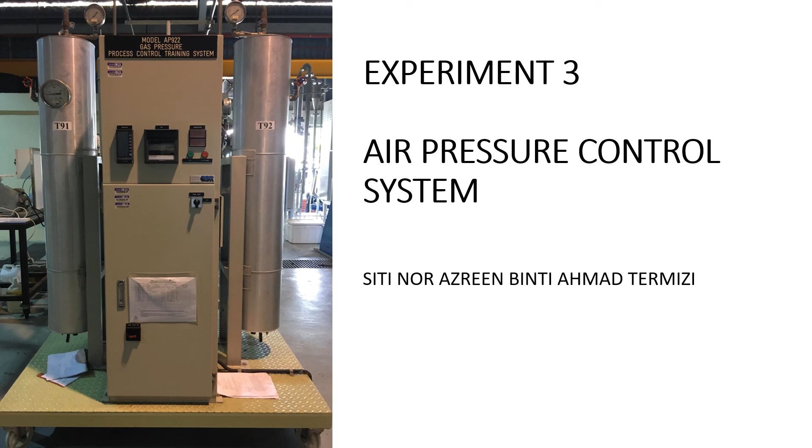So I make this special video for you to understand the experiment 3, which is air pressure control system. I did realize that if you just watch another video, you might have a lot of confusion. So I make this video special for you to understand this experiment. I really hope that you can watch till the end.

Okay, so this experiment has the objective to study the response of gas pressure control in two capacity or one capacity. But here I just explain for you the one capacity because both of it is the same.

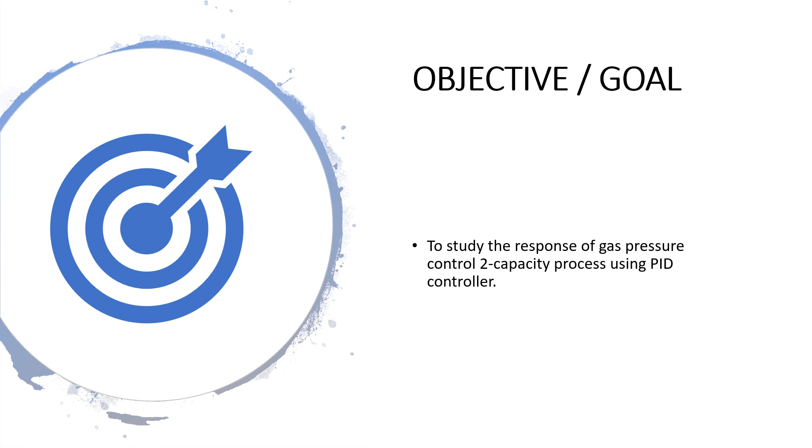So I really hope that you already watched this video, part 1, whereby I explain in general about the apparatus and how the system works. If you don't watch this yet, I would advise you to watch this first. Okay, so as explained in the video part 1, this is all the introduction to the apparatus. I will not go in detail on this one. You can go through this one in detail. At the same time, you can watch the other video, part 1.

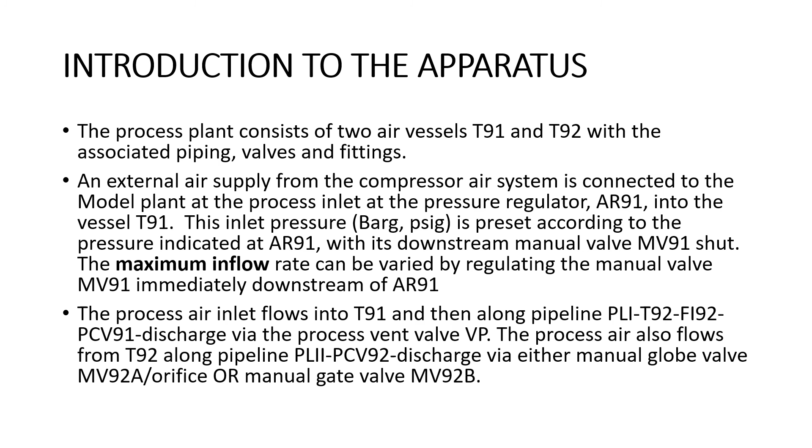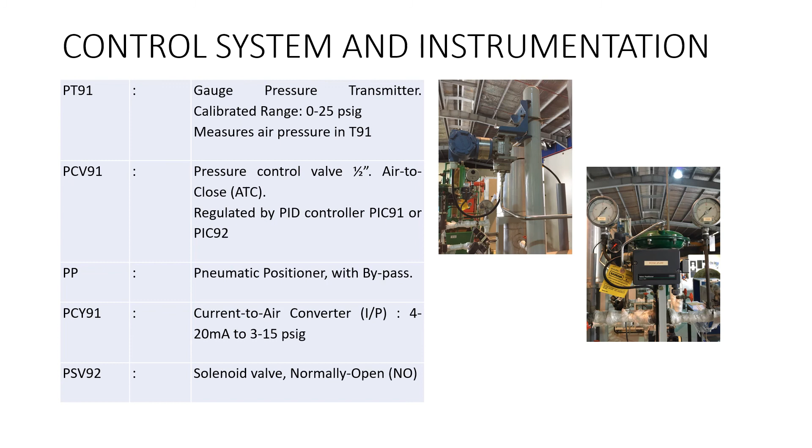We also have pneumatic positioner. Okay, it's also here. We also have current to air converter or known as transducer, this box, and we also have a solenoid valve. We have PCV92. I did show it in the video. It is a pneumatic control valve, air to close. It is used to protect the system from overpressure. It will turn on automatically when the high pressure occurs.

We also have a pressure gauge, temperature gauge, and FI92, which is a flow meter. You will see this flow meter in the first procedure. We also have pressure relief valve and a solenoid valve. And the most important here, we have a PID controller known as pressure indicator controller 91. From the screen, this controller has the value of PV, which is the value of process variable, or currently the value of control variable inside T91.

It also shows the value of SV, which is set value or set point, and the value of manipulated variable MV. Here is the percent of PCV91 closing, since this valve is air to close. MV 100% means this valve is fully shut. MV equal to 0% means the valve is fully open. Since this is air to close valve, the percentage is the percentage of closing. Okay.

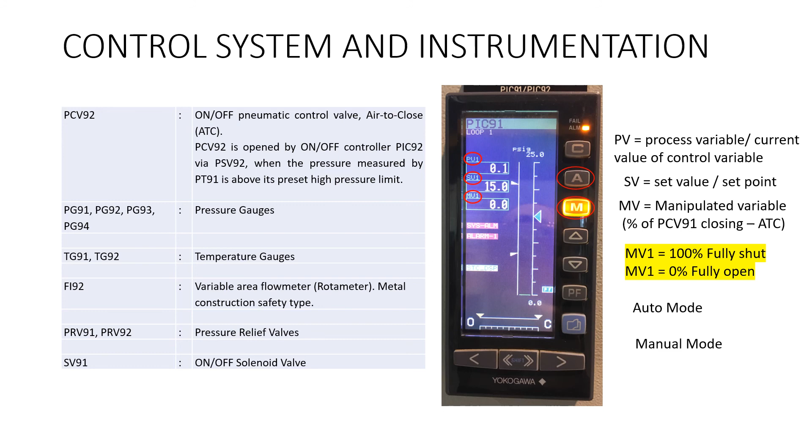So this controller also has two modes, which is auto mode. You have to press this button if you want to turn it into auto mode, or press this button to turn it into manual mode. The difference between auto mode and manual mode will be discussed later. As you can hear, this is an alarm. Okay, the alarm for pressure, alarm deviation.

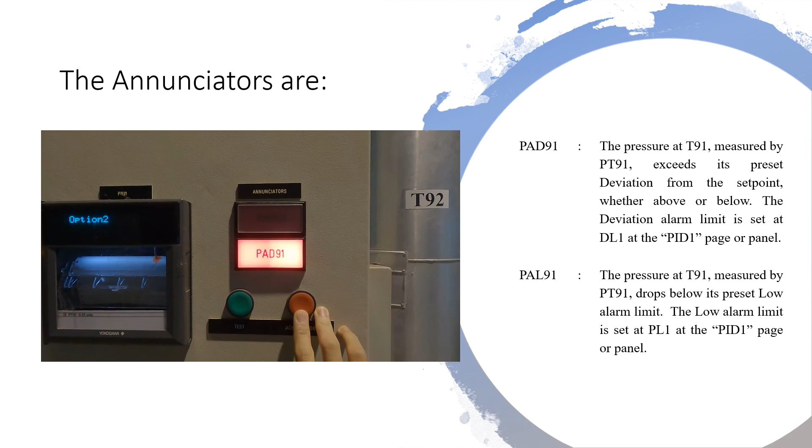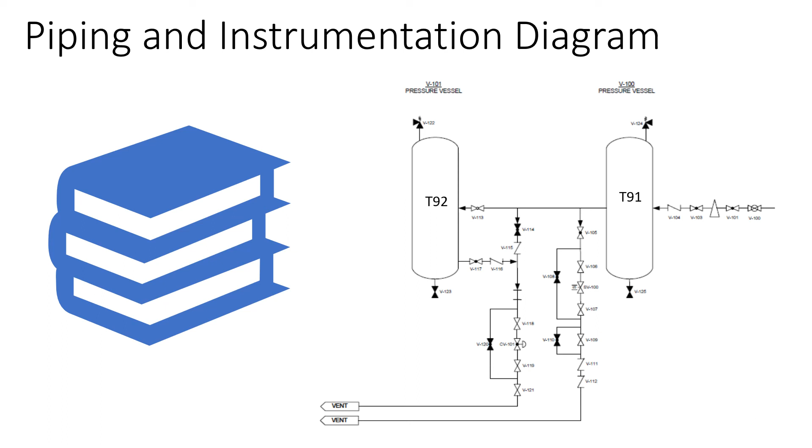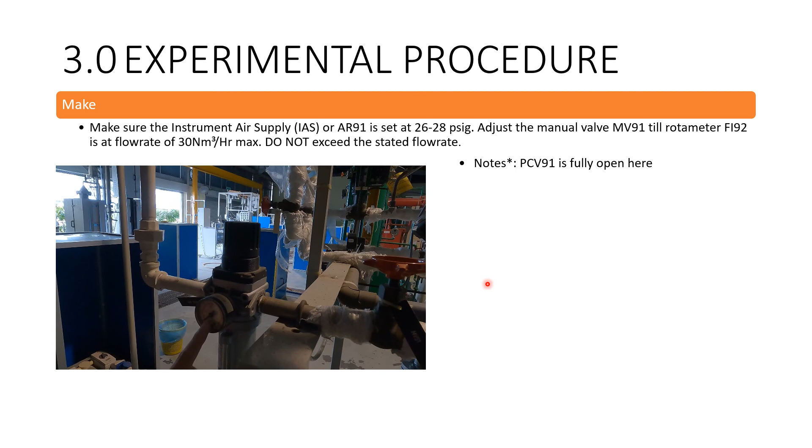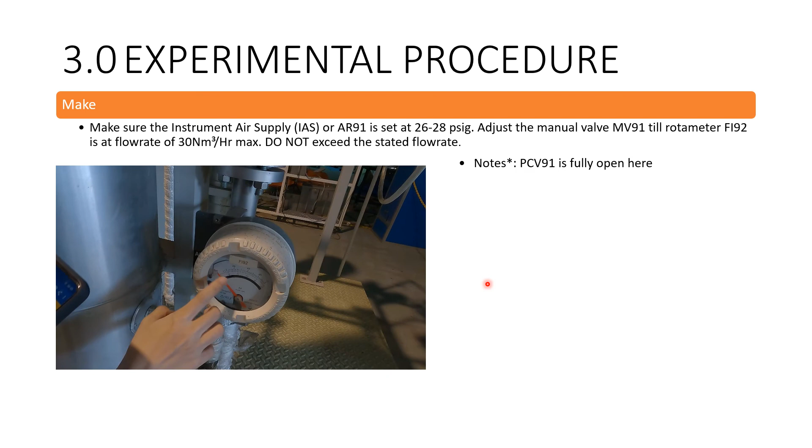Moving on to the first procedure, I did explain in the video. This is AR91, okay, is set between 26 to 28 psi. Okay, that is procedure number 1, by adjusting the manual valve MV91 so that this FI92 will show a reading of 30 normal meter cube per hour. This one. Okay.

Note that in this first procedure, you have to ensure the condition of PCV91 is fully open, but this is not stated in the procedure. I was adding that so that you can understand. In order for the gas to flow through this flow meter, the PCV91 should be fully open, because the location of this flow meter is at the outlet of the tank. Same goes with the location of PCV91.

The next procedure is for you to check the condition of pressure control valve. With the condition of pressure control valve fully shut, meaning to say the value of MV1 is 100%, the parameter PV1 should be within this range of value, 22 to 27. This procedure is for us to check whether the process air supply to the system is sufficient or not.

Okay, and in this case, you have to ensure that your MV1 is 100%, and in order to manipulate this MV value, this controller should be in a manual mode. You have to press this button. Once you get this value, you can proceed to the next procedure. If you don't get this value, you have to go back to procedure number 1.

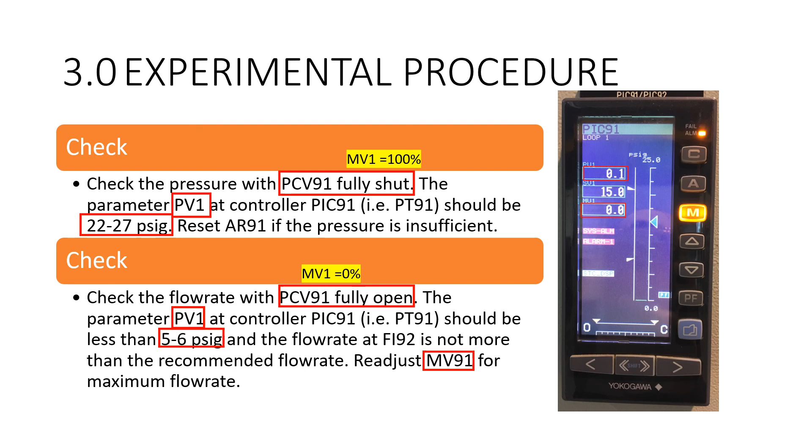For the next procedure, in the condition of pressure control valve PCV91 fully open, meaning to say the value of MV1 equal to 0, again you have to check the value of PV. In this control valve condition, PV1 should be less than 5 to 6 psi. Okay, if you don't get this value, again you have to go to procedure number 1 and adjust the MV91 so that the FI92 will show the value as stated in procedure number 1.

Moving on to the next procedure, we have to make sure that this valve is really connected to our controller. In order to check, we have to make some tests. For example, here, when we change the value of MV1 equal to 100%, we have to check physically the condition of control valve, whereby the scale indicator, which is in this red board, I'm sorry that I forgot to zoom in. The value of valve stem is exactly the same.

For example, if you have 100% MV, the valve stem should be on this level. Whereas if you have 0% of MV, the valve stem should be down here. This symbol showing it is open, and this symbol showing close. We have this system using air to close control valve, as compared to the level control system, it's using air to open, whereby you can see the symbol is in opposite direction.

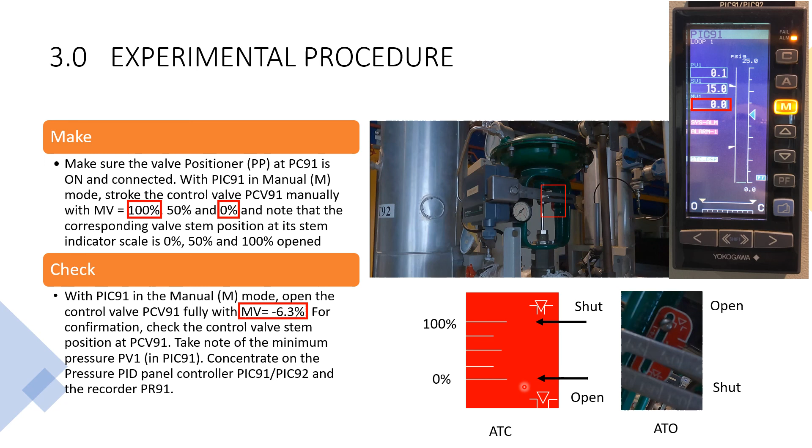Before you start your experiment, you have to make sure the connection of the flow is in a correct way, whereby there are valves that should be closed and there are valves that should be open. You can see in the video.

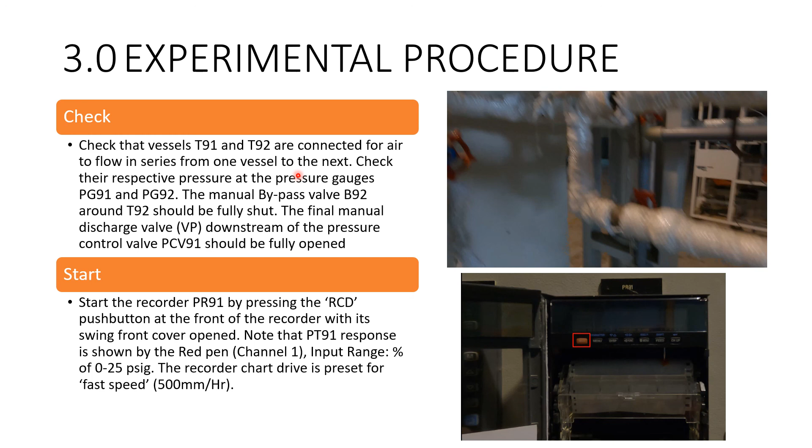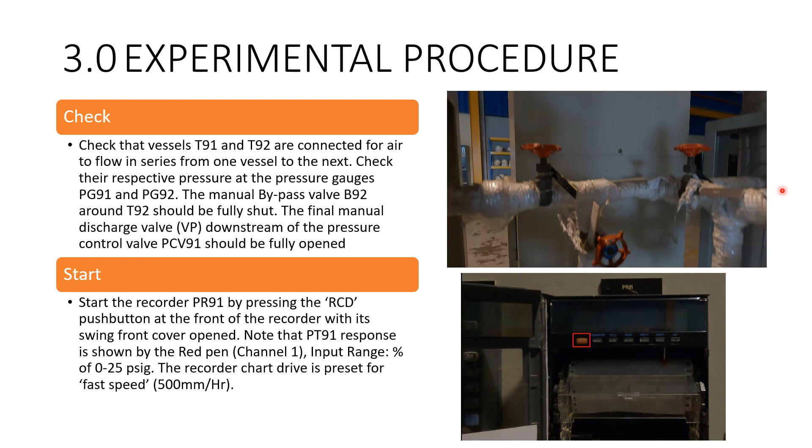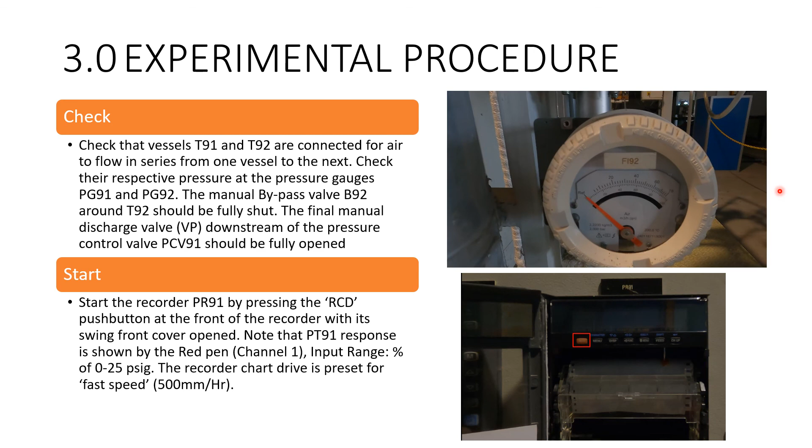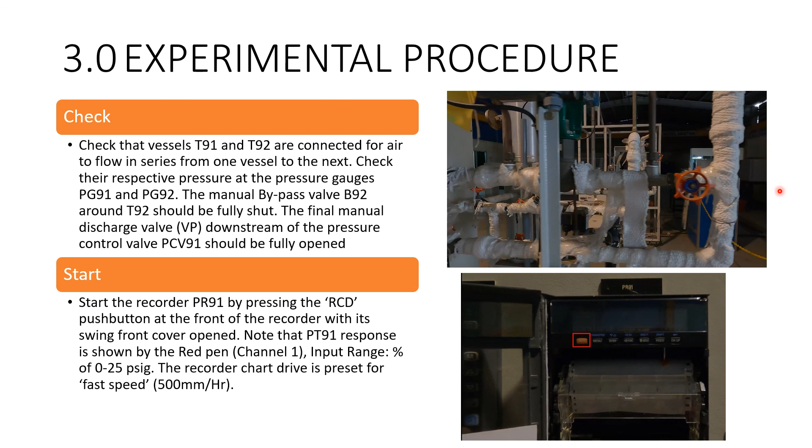Outlet from tank T91 goes down as it bypasses tank 92, goes down to this line, okay, and flows through this flow meter FI92. It will show some reading and then go out and flow through this control valve and then goes up. From this video, I believe you can identify which of the valves should be closed and which one should be open.

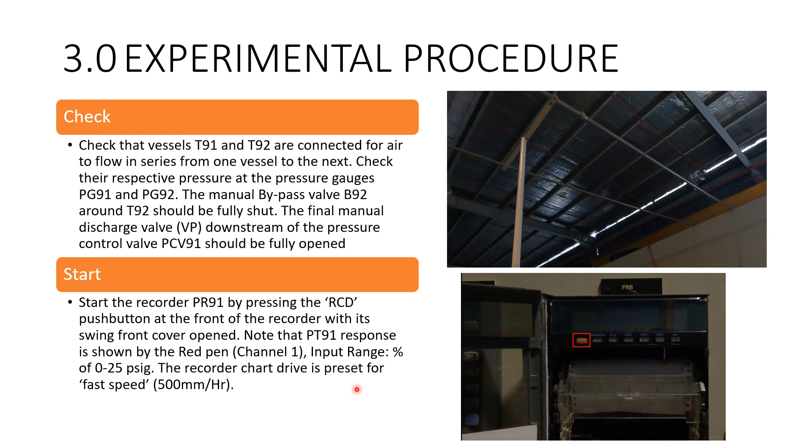To start your experiment, you have to press RCD, which is a record button at this PR91. This PR91 is a chart recorder, whereby the response of a system will be recorded here in the form of graph. Moving on to the next procedure, you have to access the value of PID setting, or known as PID value, which is the value of PB1, TI1 and TD1.

This is the main screen of this PIC91 controller, whereby this is a secondary screen. To get this screen, you have to press Shift button and this button simultaneously. Once you get to this screen, you are able to adjust the value of PB1, TI1 and TD1. The definition of these values, PB1, TI1 and TD1, you will learn later.

The next procedure, you have to set the value of your set point to be 18 psi here. And make sure you already press the RCD button again. And you have to transfer the mode of this controller to become auto mode by pressing A button. Once you press A button, this controller will do the job for you. This controller will compare between the value of PV and SP. The ultimate goal of this controller is to bring PV1 value equal to SP value.

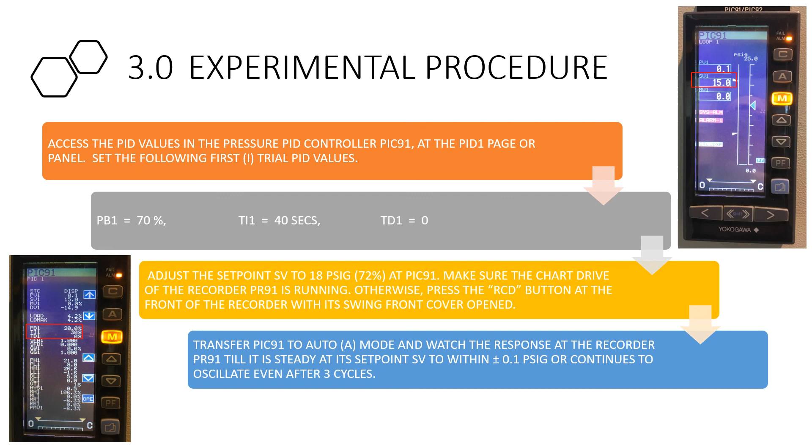Same goes when you have the value of PV higher than the value of SP. The controller will send a signal to a control valve to further open in order to release the gas so that the pressure will be decreased. There is a set of PID values that you have to test in this experiment. Along with the PID setting, there are two types of tests that you have to apply to the system, and you have to observe the response of this controller setting.

Here we have the same setting, which is PB1 equal to 70, TI1 equal to 40, and TD equal to 0, with a set point of 18, and once the process reaches steady state, you have to apply load step test. To apply this load step test, you have to refer to the next procedure. With the same setting also, you have to change the set point. These two types of tests are commonly used to evaluate the performance of controller.

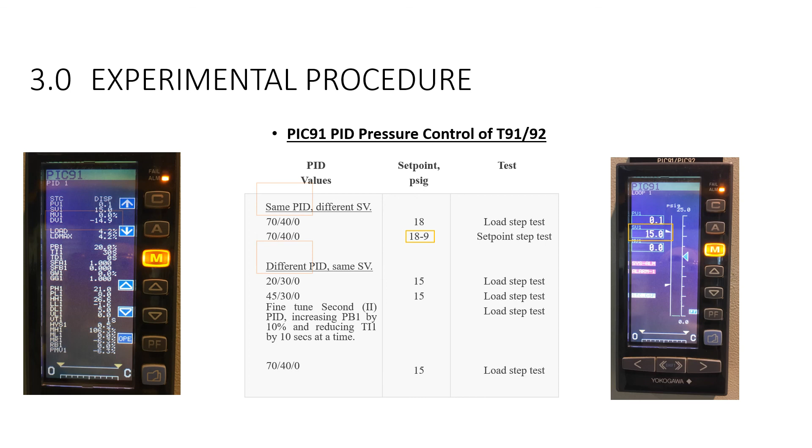Once your system reaches steady state, you have to put the controller into manual mode, and you have to decrease the value of MV by 5 to 10% by pressing these two buttons. You also can choose to increase the value of MV. Once completed, you have to quickly switch back the controller into auto mode and observe the pressure response.

This is called load step test, whereby you disturb a system to see whether this controller can bring the system back into set point, or known as good disturbance rejection. Once the system reaches steady state again, you can proceed to next procedure. But before that, I would like to explain theoretically what's going on when you apply this load step test.

Theoretically, we have a process, we have input and output. From the very beginning, you learn about mass balance and energy balance. We're talking about a process. There are input and output to the process. In this case, this process is represented by a control system. This control system has the elements of controller, control valve, the process itself, and the transmitter.

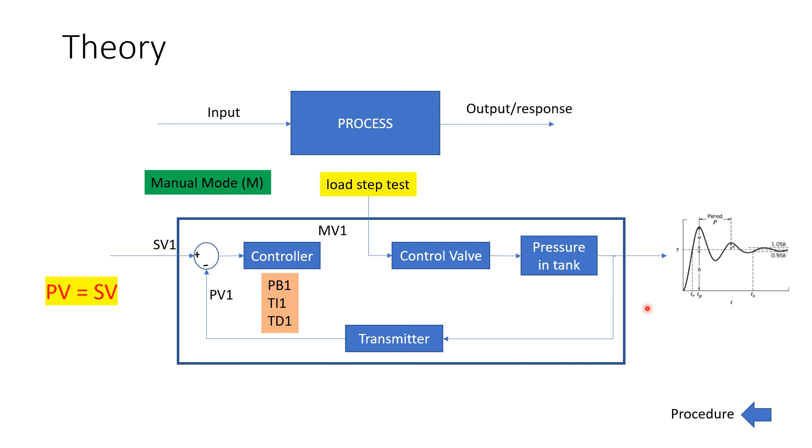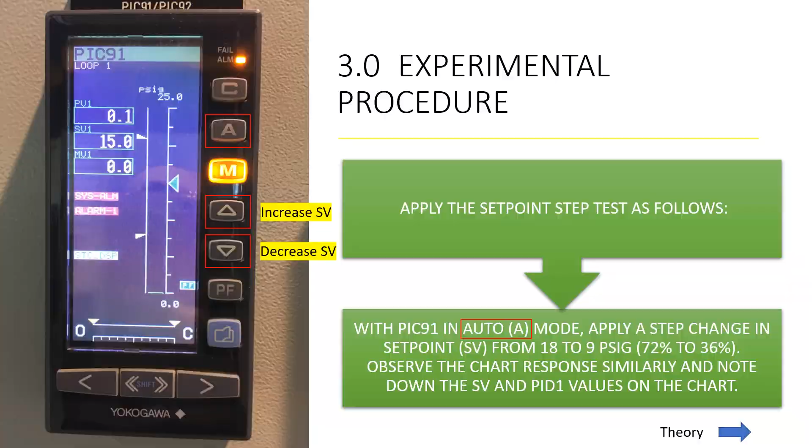Then you have another type of step test, which is a set point test, whereby we're going to change the value of set point. In this case, the controller can remain in auto mode. You just have to press this button to increase the value of SV, or this button to decrease the value of SV, with the controller in auto mode, and you just have to wait for it to respond. So, as compared to the previous one, you didn't do anything here, but you changed the value of set point here.

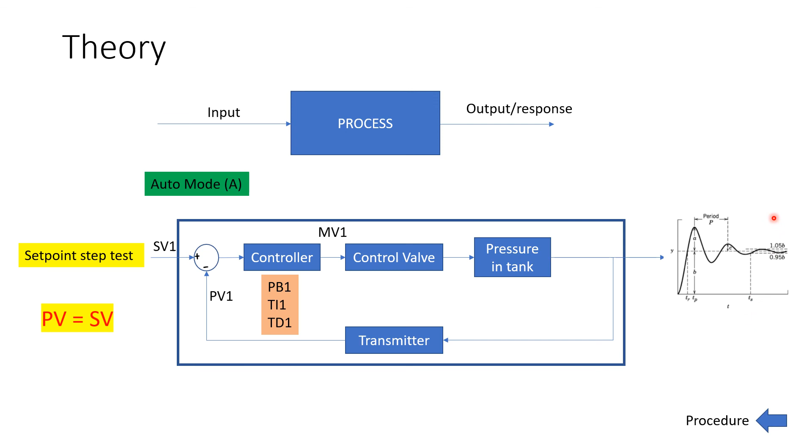When we change the value of set point from 18 to 9, we would like to observe the performance of this controller based on this setting, whether the performance is good or not. The performance of this controller, you will learn. I will give you some knowledge later on. To evaluate the performance of a controller, the response has to be characterized by these parameters. You will learn about this later on in class, what is the definition of these parameters.

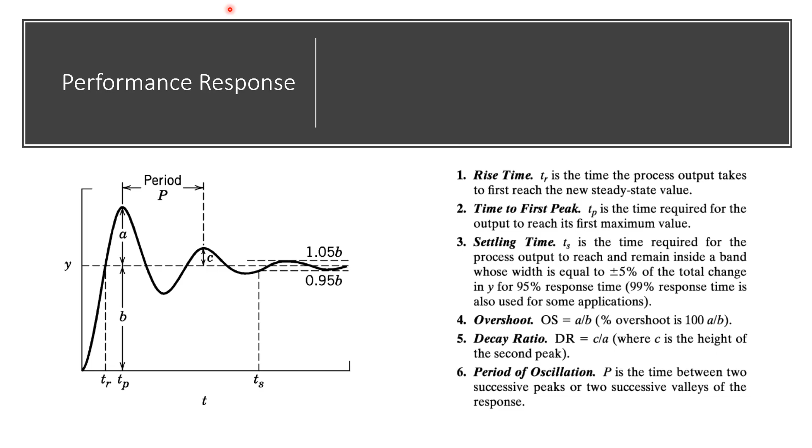In this procedure, you will need to observe your response, whether the response tends to oscillate outside the desired value. If it is inside, it is okay, but if the response tends to oscillate outside the desired control band, you should check. There are things that you have to do, which is you have to decrease the value of TI to 10 to 20 instead of 40, so that it will increase the effect of integral of the controller, and it will slow down the process inlet so that the oscillation can be removed.

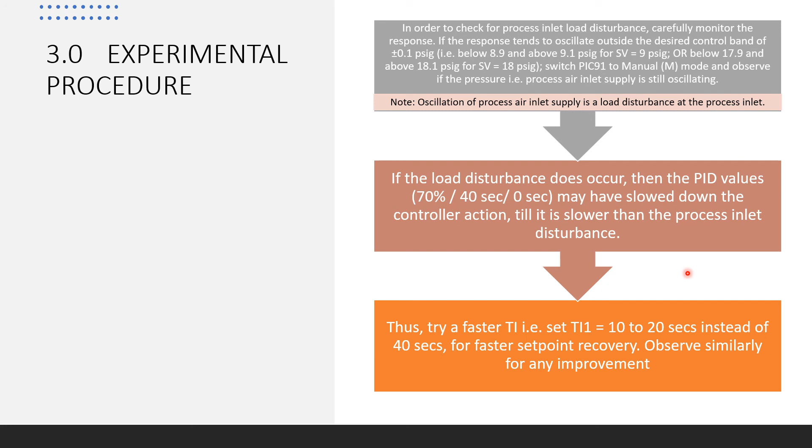But for this procedure, you will really need your response in terms of a graph to set it. Without that, it is difficult for you to understand.

And last but not least, to stop the experiment, you have to shut the MV91 so that there is no air supply into the system. You have to switch the controller to manual mode and reset the value of MV to 0% so that the control valve is fully open. All the compressed air can be released from the tank, and you can shut down fully the system at the switch button. Okay, I think that's all about this experiment.